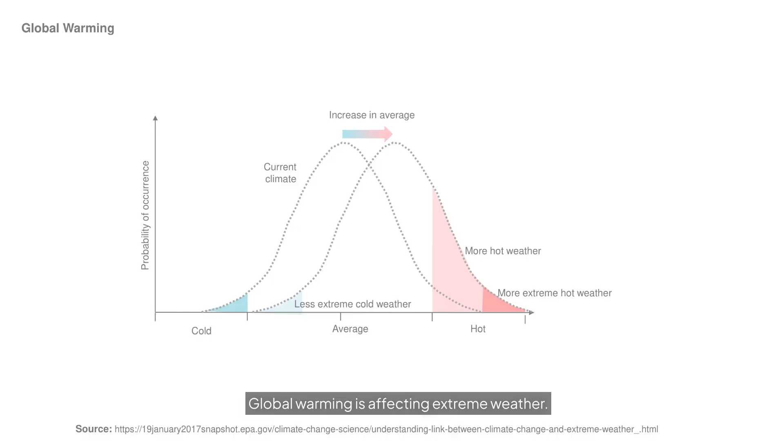Global warming is affecting extreme weather. As shown in the figure, as global warming increases, the overall distribution of weather events shifts toward the hotter side, meaning that there are far more extremely hot days and heat waves are becoming more common and more intense.

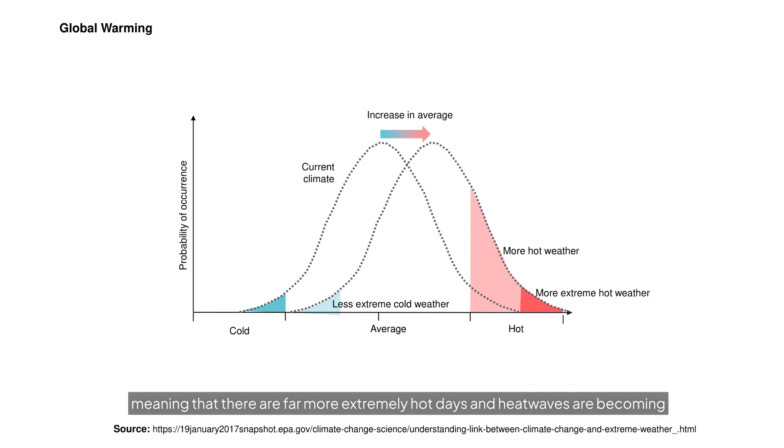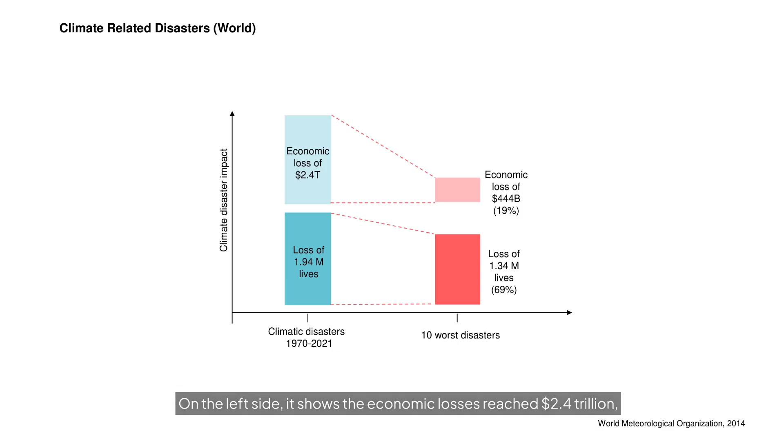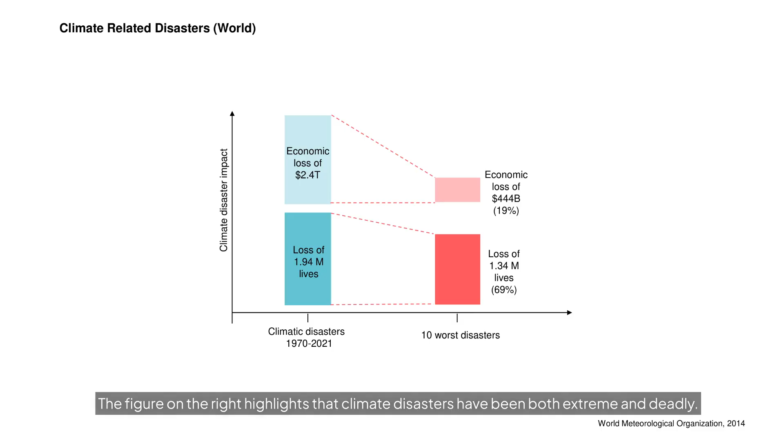This slide explains global climate-related disasters. On the left side, it shows the economic losses reached $2.4 trillion, with 1.94 million lives lost from climate disasters during 1970 to 2021. The figure on the right highlights that climate disasters have been both extreme and deadly. The 10 worst disasters alone accounted for 19% of total economic loss and 69% of deaths.

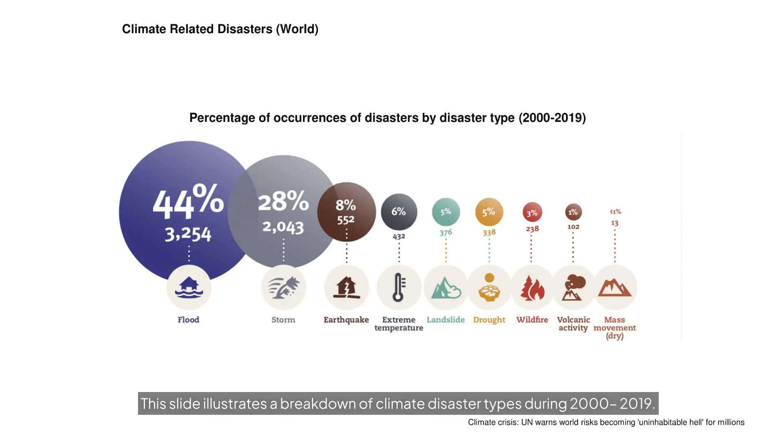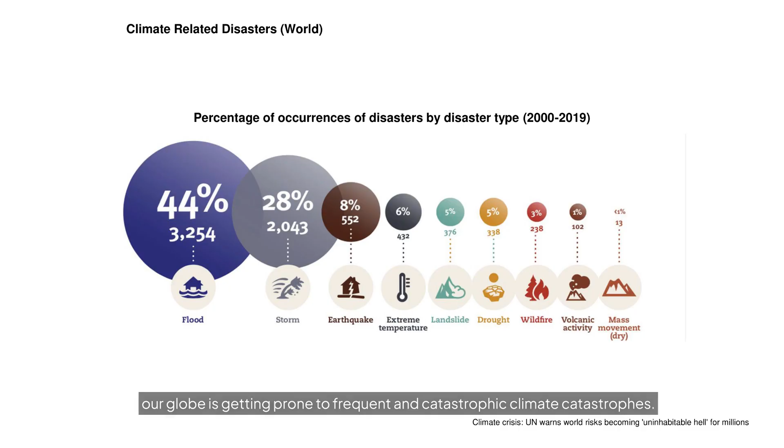This slide illustrates a breakdown of climate disaster types during 2000 to 2019. For instance, floods and storms dominate the largest and second largest share of these disasters, followed by earthquakes and extreme temperatures. From heat waves to hurricanes of a destructive nature, our globe is getting prone to frequent and catastrophic climate catastrophes. Therefore, it is critical to integrate climate-resilient design strategies into our buildings and the built environment.

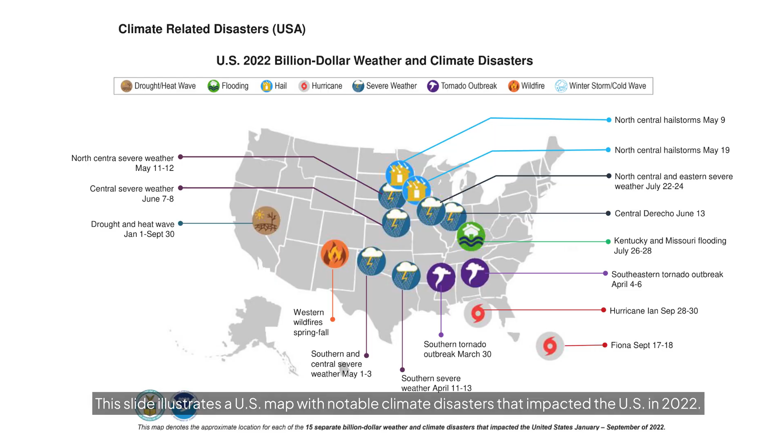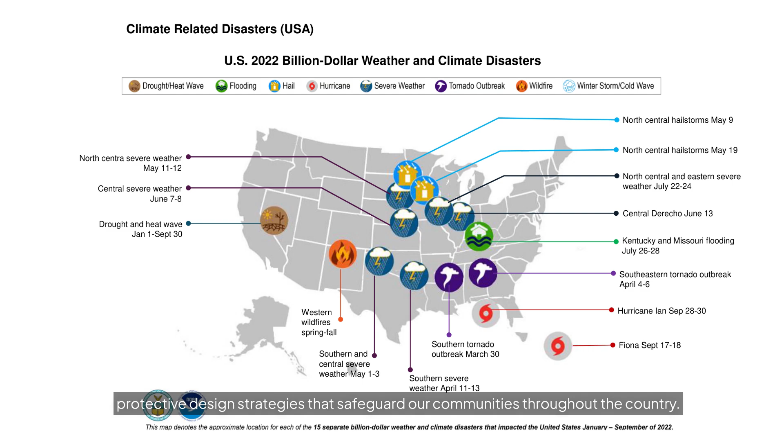This slide illustrates a U.S. map with notable climate disasters that impacted the U.S. in 2022. Numerous billion-dollar climate catastrophes occurred, ranging from severe storms in the central states to tornadoes and flooding in the south and mid-east. The hurricanes that hit the coastal regions caused massive destruction as well. The western states also faced extensive wildfires and severe droughts. Such increasing climate disasters highlight the need for resilient, protective design strategies that safeguard our communities throughout the country.

So how do we respond to climate disasters? This brings us to the concept of resilience. Resilience is defined as the capacity of a system or material to return to its original state after being stressed or deformed. In other words, it is the ability to adjust easily, to change and recover to the original state.

In the context of our built environment, resilience means that our buildings and infrastructure can not only withstand natural disasters, but also continue to function, recover quickly, and provide a safe environment for the people and communities.

Now let's talk about a resilient architecture design approach. We can think of resilient architecture as a cycle with 4 key phases: original state, mitigate, adapt, and recover. This approach ensures that buildings can return to their original state after disruptions. The first, original state, is the original building conditions where safety and functionalities are well performed for users.

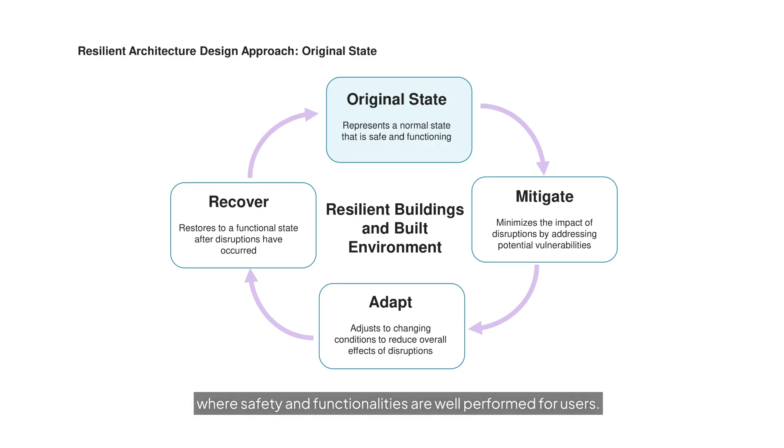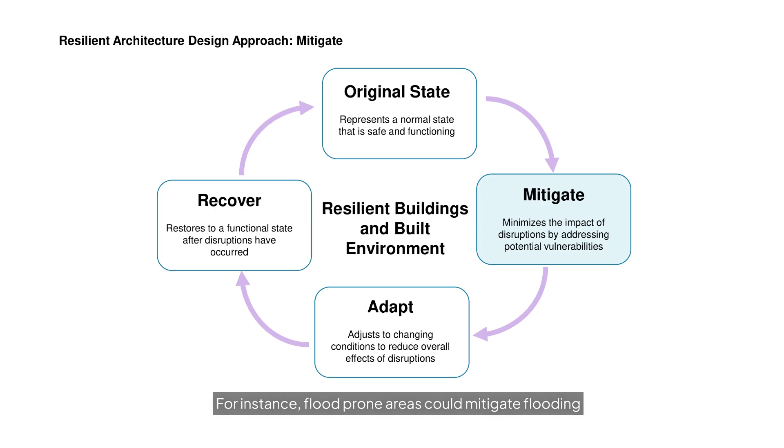Second is mitigate. In this phase, buildings are designed in a way that climatic impacts to the building are minimized. For instance, flood-prone areas could mitigate flooding by elevating structures and preparing porous site conditions. This proactive approach is essential for mitigating the impact.

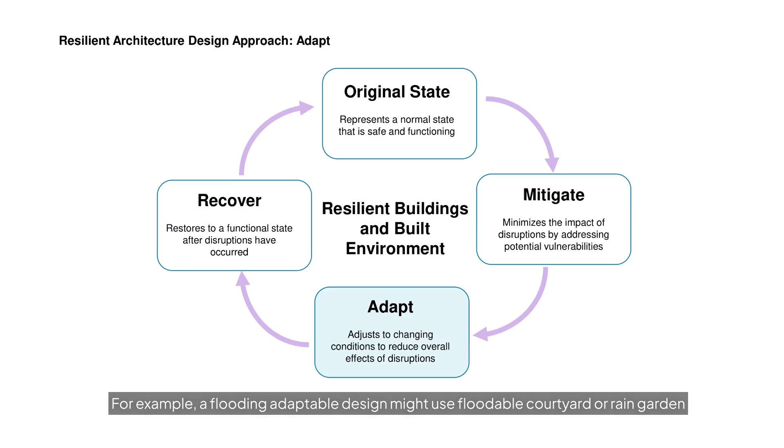Third is adapt. In this phase, the adaptable design involves adjusting to environmental changing conditions to minimize the overall effects of disruptions during an event or over time. For example, a flooding adaptable design might use a floodable courtyard or rain garden that helps delay flooding and gradually store and release water. After the flood drains away, those sites return to community use.

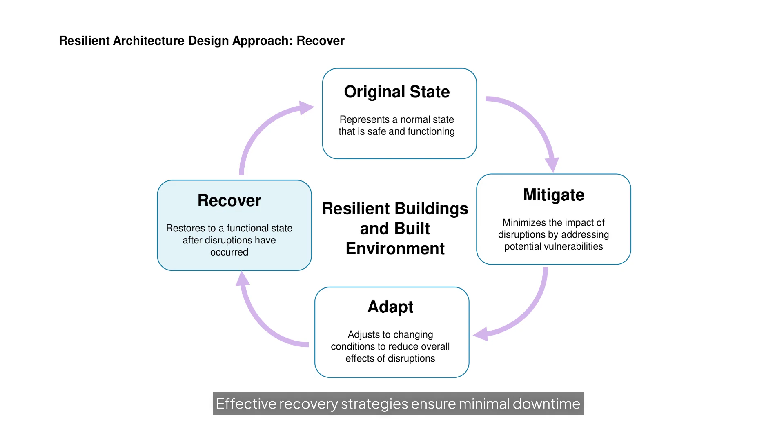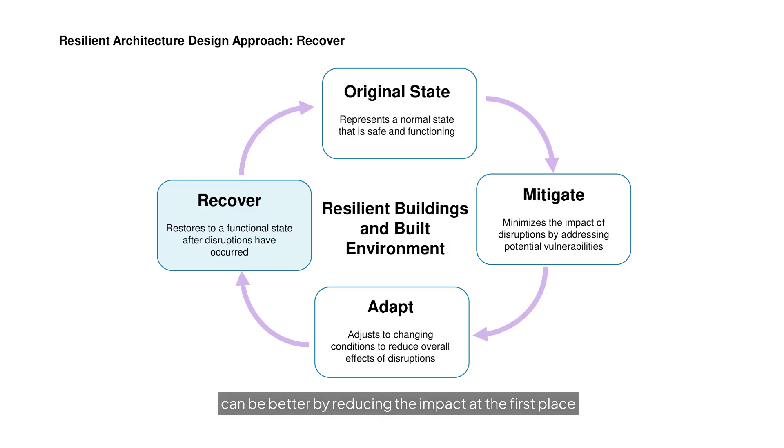Lastly, recover is to make sure that buildings can be quickly restored to the original functional state after a disruption. Effective recovery strategies ensure minimal downtime and maintain safety and usability of the building. Considering all these strategies ensures that extreme impacts resulting from certain climate events can be better managed by reducing the impact in the first place while adapting to the event and recovering post-event functionality and usage.

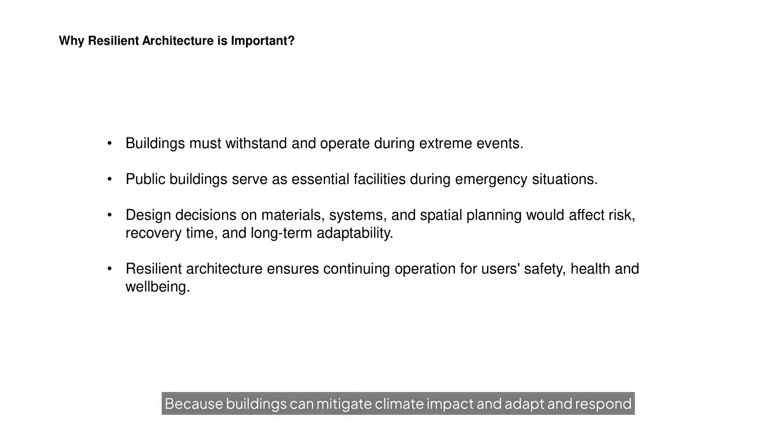To summarize, why is resilient architecture important? Because buildings can mitigate climate impact and adapt and respond during climatic disasters, not being just static structures. A resilient building remains operational during extreme events. Especially public facilities like hospitals, shelters, and emergency centers should function well in a crisis. Even in the face of misfortune or emergency, our built environment must continue to serve its essential, safe functions.

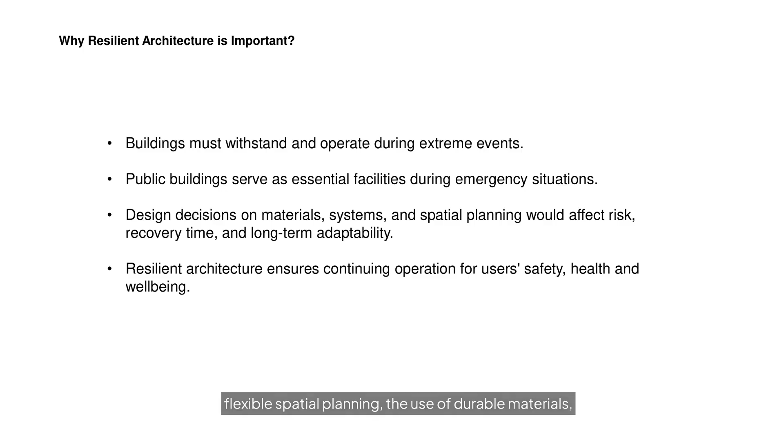Holistic design during the design process affects a resilient building through flexible spatial planning, the use of durable materials, the integration of energy-efficient systems and backup power, and so on.